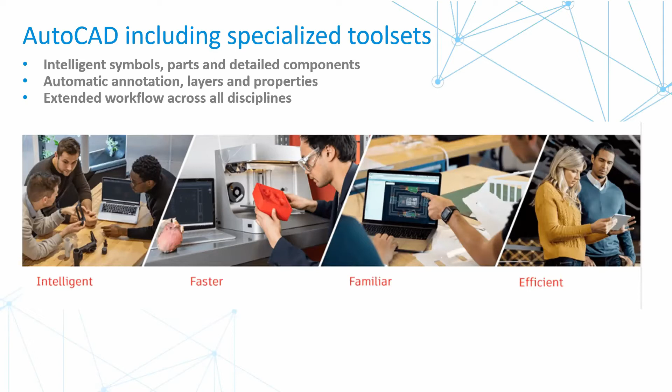We now have libraries containing intelligent symbols, parts, and detailed components. AutoCAD has also automated the creation of annotations, layers, as well as properties. These benefits will extend our workflow across all disciplines. And the great part about this is that you'll find all these features within a familiar AutoCAD interface.

Each toolset is designed to automate tasks that used to take us hours or even days to complete. For example, this study conducted by Autodesk shows that by using the architectural toolset, you could improve your productivity up to 60% compared to using basic AutoCAD. On the other hand, the electrical toolset can boost your productivity up to 95%, saving you more time and improving the consistency of your deliverables.

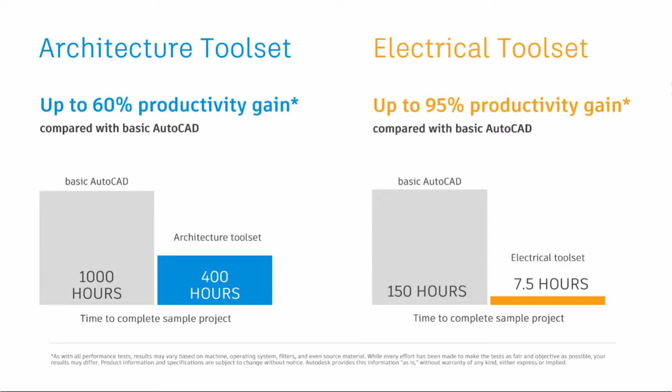Now, let us have a closer look at the state of the art, which is the AutoCAD web and mobile app. These applications make it possible for you to design and work in the field and on the go. Whether you choose to use AutoCAD on Microsoft Windows, Mac, a tablet, a smartphone, or on the web, we have the right AutoCAD for you.

There's no need to bring printed drawings to job sites and client visits anymore. Be productive and take the power of AutoCAD with you on your smartphone and tablet. The AutoCAD mobile app lets you view, edit, and create drawings anytime and anywhere. Another advantage is that you can also work offline.

AutoCAD web gives you quick anytime access to the latest drawing from any computer. This means if you happen to forget your smartphone or tablet, you can still access the required drawing from your client's desktop or laptop anywhere in the world. Since it runs on a web browser, there's no need for another software installation. Simply visit web.autocad.com, sign in, and start working.

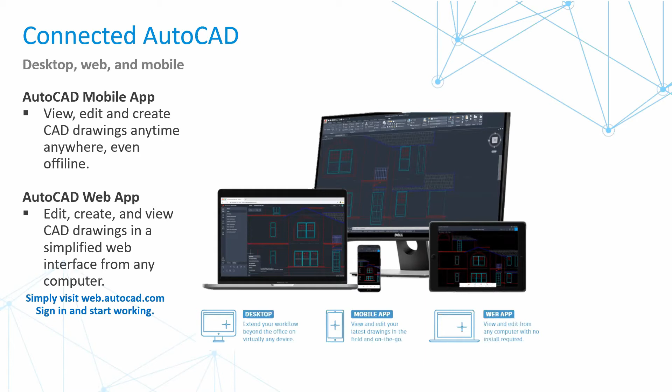Now let us look at the benefits of both the web and the mobile app. Firstly, you can view and edit your latest drawings in the field and on the go. You can access updates in real time through cross-platform workflows with AutoCAD and AutoCAD LT software.

Secondly, there's no need to carry printed drawings to sites and client meetings. You can collaborate and make changes in real time, reducing unnecessary communication delays and trips back and forth to the office. Just imagine.

Thirdly, the AutoCAD web and mobile app provide the core AutoCAD interface, like drafting tools, precision, consistency, and the fidelity that you have come to expect from AutoCAD.

Lastly, you can stay connected to your drawings wherever you are. You can quickly access DWG files with Autodesk Cloud, as well as leading cloud providers like Google Drive, Microsoft OneDrive, Box, and Dropbox.

Now let us see how easy your work life will be with the use of AutoCAD Web and AutoCAD mobile app.

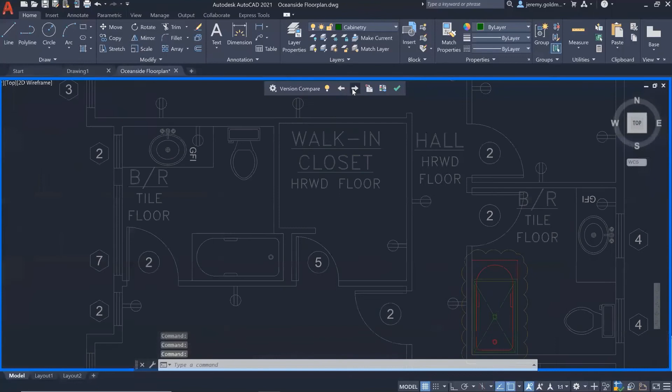You can enter a compare state to view the differences between the current version with the last one that you saved. Now, your team experimented with adding some rooms on the first floor, but during the review, the client said that she wanted to go back to an open floor plan that you had earlier.

You can pull up the new Drawing History palette to see past versions of the drawing. From this palette, you can filter previous versions by who saved them. You can also filter by when the drawing was saved. This looks like the right plan.

From the History palette, you can choose to compare this past version with the current drawing. You'll see the open floor plan from the previous version represented in red. Let's turn off visibility for the previous version so you can select the new geometry and erase it. When you turn the previous version back on, it will show the open floor plan.

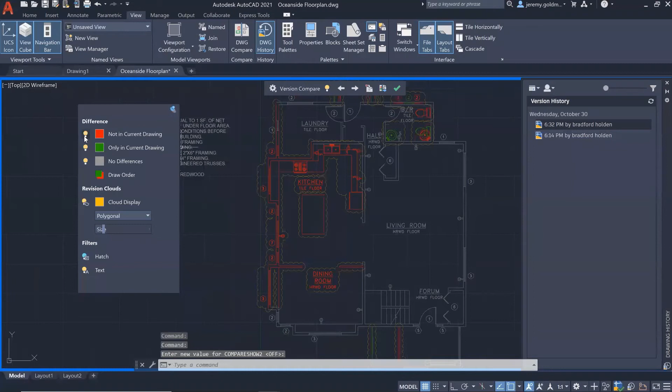You can use the import feature to bring this geometry into the current drawing. Since this is a live comparison, any deleted geometry that was shared by both versions will show in the previous version, so you can import that back to the current drawing. So now the open floor plan is restored.

One benefit here is that the geometry that you import will automatically be added to the correct layer based on the layer from the previous version.

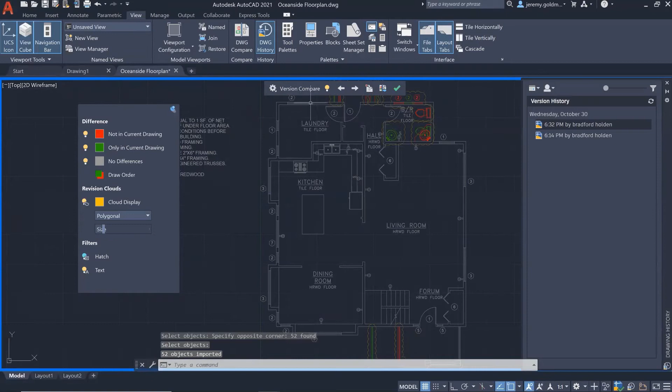Now, there were some recent changes that you wanted to keep in the drawing. We can see them here again, and you can leave them in place and exit the compare state with the best of both versions.

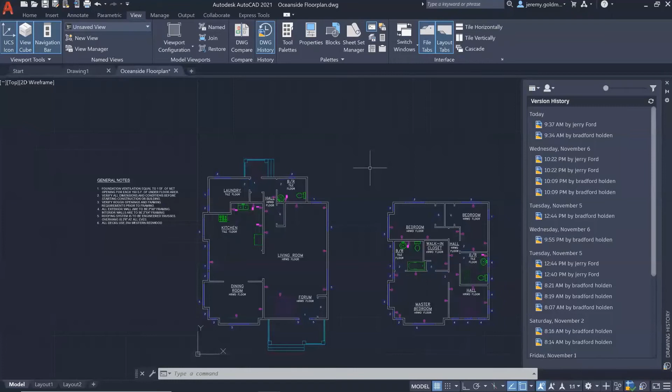What's best is that we did this without having to save or manage separate file versions. So with drawing history, you can get insight into the evolution of your work easier than ever before.

Great feature, isn't it? With this, you can now track changes in your drawing from your previous drawing to the second drawing and the final drawing, and all changes will be highlighted. Should you have the need to import features from the previous drawing, you can, without having to use copy and paste.

The next feature is Xref compare, or external reference compare. Now you can use the popular DWG compare feature for external references attached to your drawing. If an external reference has changed, a notification will automatically display within your AutoCAD.

Click on the notification to compare changes within the context of your current drawing. Like DWG compare, Xref compare highlights the differences between versions, and changes can be imported into the current drawing in real time. Let us have a look at the demonstration to have a clear understanding on how this will improve your work life.

The new Xref Compare feature in AutoCAD 2021 helps you understand what's changed in the files that your drawing references. Let's say you've recently begun work on the power for a building. As you open the drawing, you'll see that there's a change to the floor plan through this bubble notification. You can choose to view the differences right from the notification.

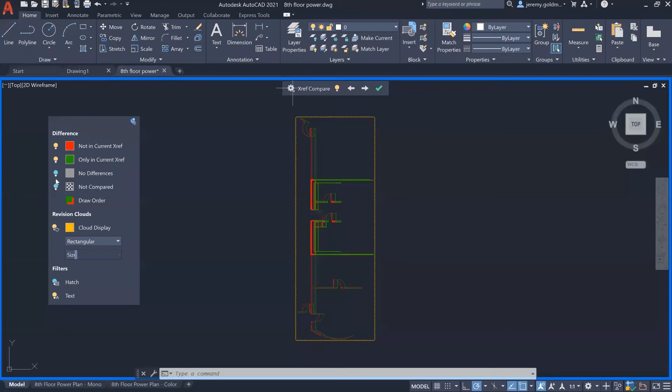As you navigate to the changes in the Xref, you can edit the geometry of the host drawing. There are some outlets here that need to be adjusted to accommodate the new floor plan. You can reference the previous and current Xref versions to guide your edits.

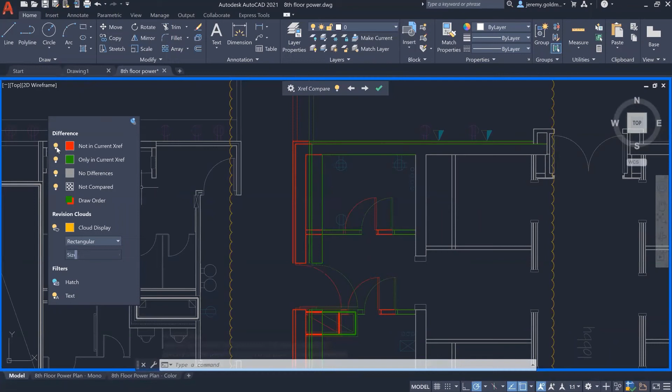Here, you can choose to view only the new Xref version to make sure that your changes work with the new layout.

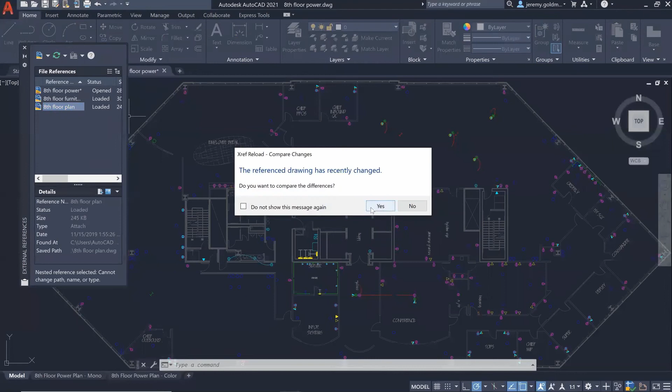And for those who rely on the Xref palette to manage updates, you can also enter the comparison from within the palette. When you reload an Xref from the palette, you'll be presented with an option to compare the changes. You can navigate these changes and make sure no further updates are needed.

In the past, it's been a manual and time-consuming process to keep track of the changes in the project around you. By helping you automate this process, we know we'll be able to save you valuable time and help you get back to meaningful work faster.

Great feature, isn't it? Next, now let us look at our improved features within AutoCAD 2021.

The blocks palette feature has been improved so that you can access your blocks anytime and anywhere. The blocks palette now lets you sync recent blocks from your drawing into a cloud, and you can access them anywhere using any device, like a cell phone, desktop, or web. Let us see how efficient this is.

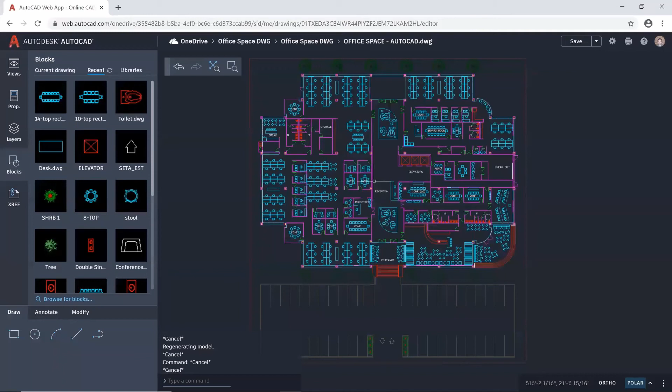In AutoCAD 2020, we introduced a new way of managing blocks with the new Blocks palette. In AutoCAD 2021, we've made improvements to the Blocks palette that make your blocks accessible from anywhere. If your block library and recent blocks are set to a supported cloud storage provider, such as Box, Dropbox, or Microsoft OneDrive, you'll be able to access your blocks across other devices and on the AutoCAD web app. In this drawing, we'll insert a fixture to this office remodel.

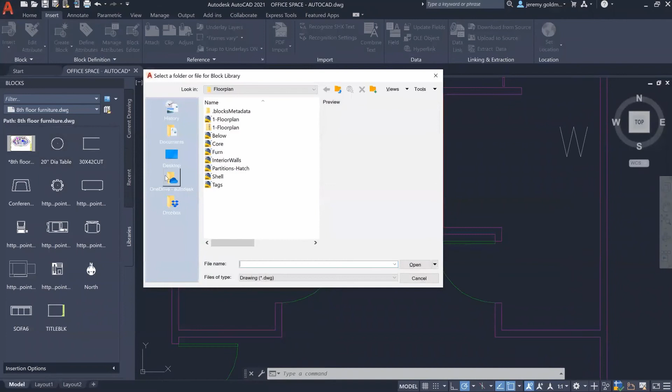In the updated palette, you can find, preview, and insert blocks. Select a folder from a cloud storage provider that contains your blocks. Let's add this sink block into the drawing.

Let's say later on you're away from your computer and you realize you need to insert a different sink. Even though you don't have access to AutoCAD, you can use the AutoCAD web app from any browser. Just go to web.autocad.com. And since your blocks library is saved on the cloud, you have access to the same block library and recent blocks list from desktop.

Let's fix the sinks. First, delete the existing sink. Then, on the Blocks tab, use the block library to add the new sink block into the drawing, just as you would have on desktop.

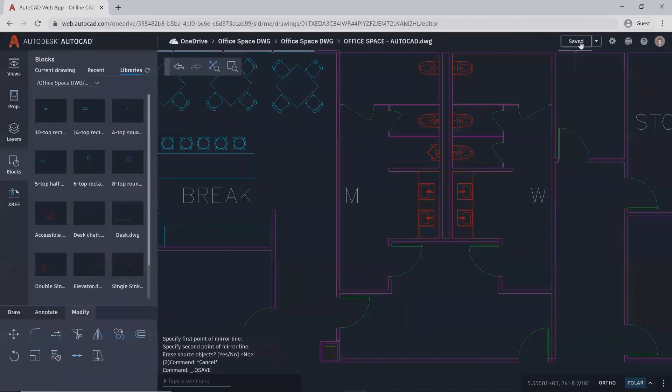Now that you've fixed the drawing, you can save it. With the new Blocks palette on AutoCAD Desktop and the AutoCAD web app, you'll be connected to your block content anytime, anywhere.

The next improved feature is the Quick Measure tool. This allows you to display all nearby measurements in a drawing simply by hovering the mouse anywhere on the drawing. Now let's see how this will add value to our workflow.

Measuring distances in your drawing has become much faster with the new quick option of the MEASUREGEOM command. When this option is active, the command displays dimensions, distances, and angles within a 2D drawing dynamically as you move your mouse over and between objects. The distance between two objects is measured only if the objects are parallel. The small orange square in the corner indicates the lines are at a 90-degree angle.

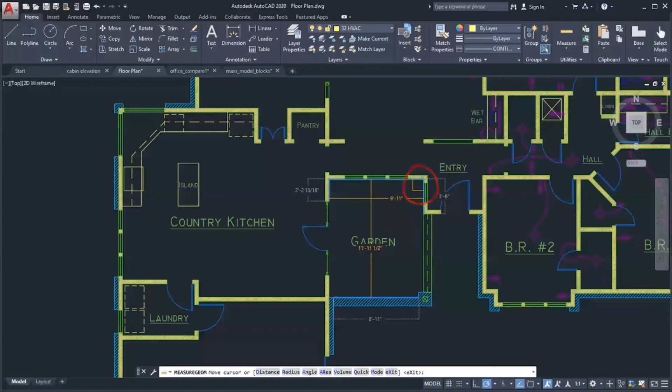Finally, performance has been improved in AutoCAD 2021, which means you can work faster without any lagging. What has been improved? 2D graphics have been enhanced. Now you can pan and zoom faster in real time. You will also experience an automatic regeneration operation for a smoother experience.

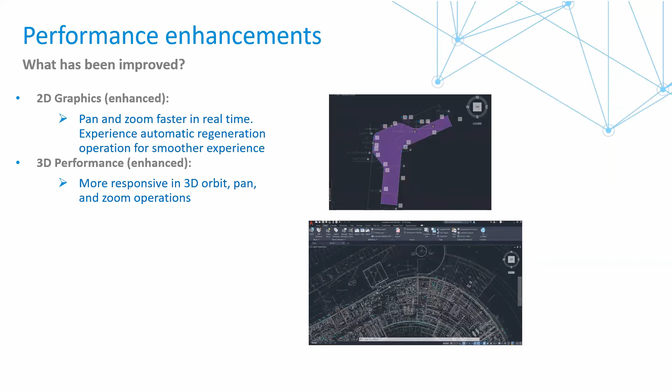3D performance: the software is much more responsive in 3D orbit, pan, and zoom operations. Under AutoLISP, you can edit and debug files with the new extension for Microsoft Visual Studio Code. Additionally, Unicode characters are now fully supported.